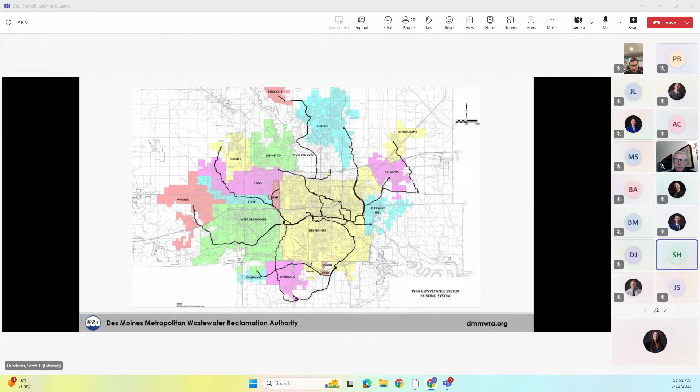Like I said, the City of Des Moines is the operating contractor. The operating contract term was actually a 20-year term that ended June 30th of '24. Right now, the City of Des Moines and the WRA board are working on an amendment to that agreement, or a new agreement, to reflect what's actually been going on lately, and we're anticipating that getting done later this year. We're also working on a new WRA agreement, which facilitates the new facility plan on how we go forward as far as funding all those projects, the needs, the growth, and the rehab of the treatment plant and facilities. So that's going to be oncoming as well.

The board and City of Des Moines jointly appoint the WRA director. I, as director, oversee and manage the day-to-day activities of the WRA. And as I said before, all the employees here at the WRA are members of the City of Des Moines Public Works Department.

Right now I'm going to go over the current fiscal year 2026 budget. This will take effect first on July 1, 2025. There are three main categories of this budget, and this budget was approved last month at the WRA board meeting: O&M (operations and maintenance), debt service, and the capital improvement plan.

For FY26, it was determined that we will collect $66 million from communities. Our net operating budget is about $13.2 million, which is offset with revenues and prior year credits. We actually underspend every year a little bit, and we give that money back as credits. Then we have revenues, which I'll get into a little later. The operation budget has remained relatively flat.

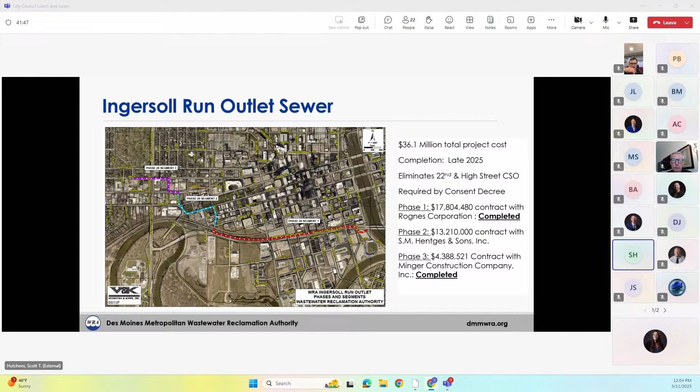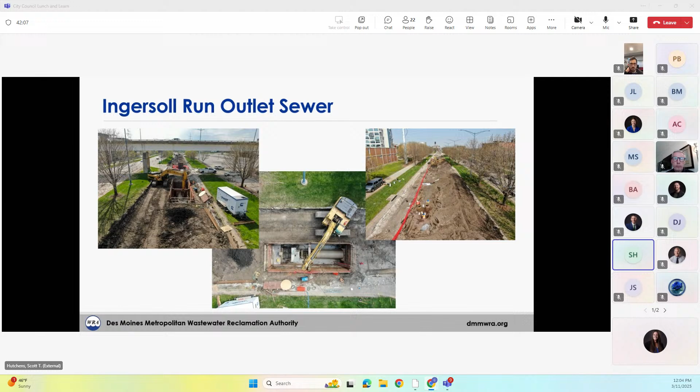This is a project that if you were downtown Des Moines on MLK going down to the Cubs or the Science Center, we had the whole south or north lane of MLK completely torn up. It was a very disruptive project, but it got done ahead of schedule, believe it or not. We reopened that 6 months early compared to when the contract was available, so we were glad to get that project, even though it was a big disruption for anybody traveling in downtown Des Moines.

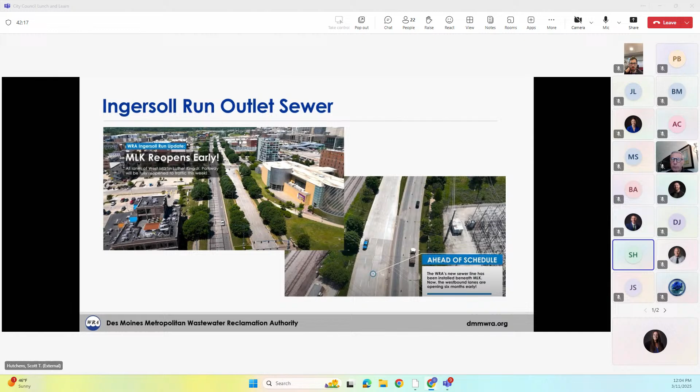The next project is the Birdland Pump Station. This is part of our consent decree, down by the Birdland Marina. The picture on the left is the old Birdland Pump Station, which needs to be rehabilitated because it doesn't have the capacity that we need.

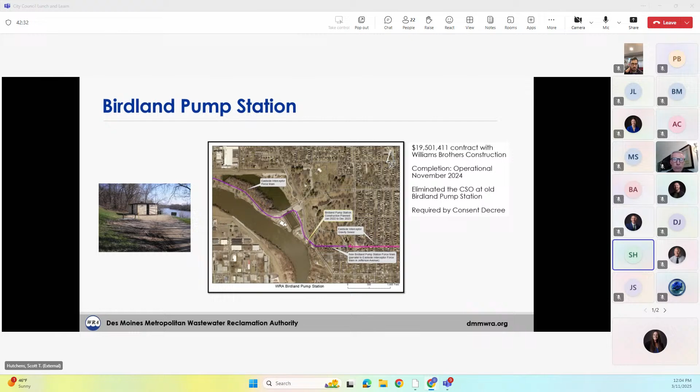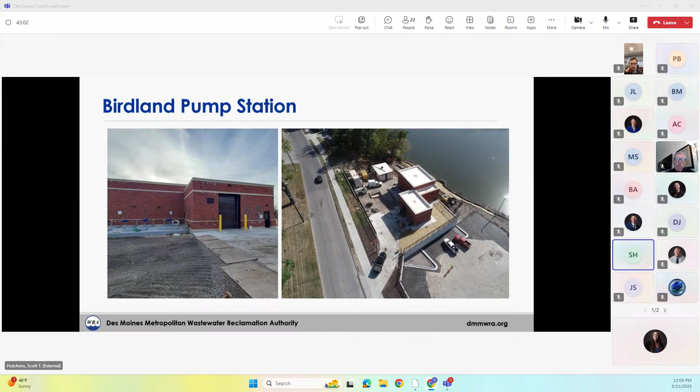This project is now complete, but these were pictures during construction. As you can see, it's kind of unique architecturally. We worked with the neighborhood to get this to fit in with the old and new of that area. It looks like we bricked up old windows, but that was by design. It's a brand new building, but that's what the architect and the neighborhood agreed to, so we made it fit into the area down there. That's just the internal components of it with the pumps and the bar screen.

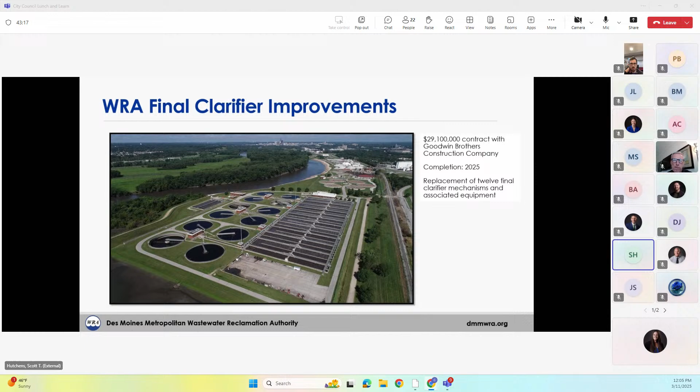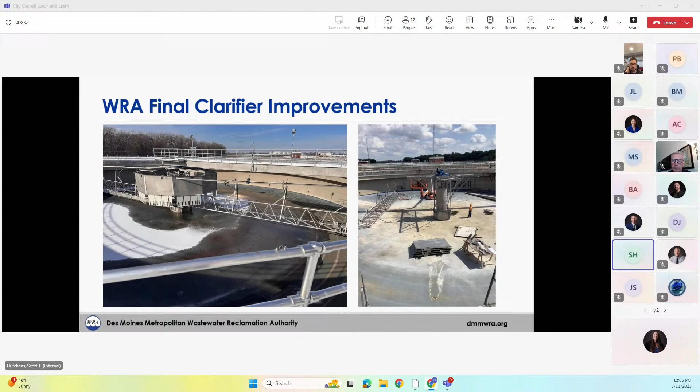This is a final clarifier improvement project. All those round tanks you see on the left side are final clarifiers. Those have been in operation since the mid-1980s. The internal mechanisms, as you see here, these are the new ones. They run continually, and they just flat out wore out after 40 years of continuous work, so those all needed to be rehabbed and redone in order to make sure we continue to process the wastewater like we need to.

WRA Effluent Pumping is a project partially funded by the Flood Hazard Mitigation Grant Program that the state had, in conjunction with the city of Des Moines, and we received quite a bit of money for this project. When the river is up, we still need to be able to get our treated wastewater out. In the past, we've had trouble doing that and it backs up into the system, so when river levels are high, we'll still be able to get the treated wastewater out.

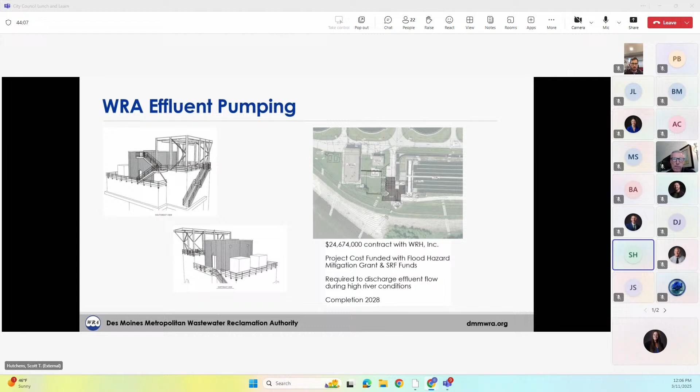That's what this project will do. This project just was bid and is just getting started, and will be completed in 2028.

We actually have an additive that we currently add to the wastewater that helps break that down, but the phosphorus recovery project will completely eliminate that and will help us when phosphorus does become part of our permit levels. We'll pelletize the phosphorus and get a little revenue, about $900,000 a year from doing that.

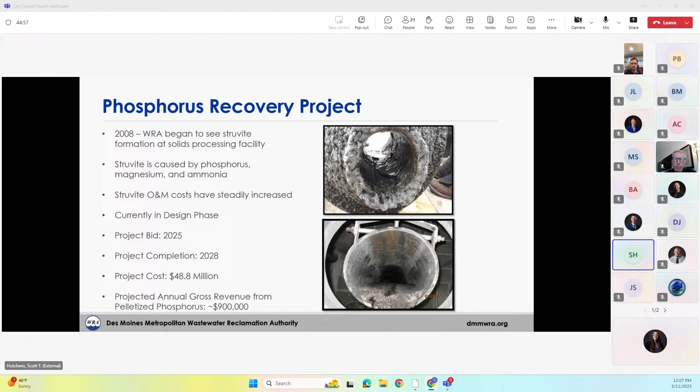This project is going to bid later this year, and it's about a 3-year completion. This is just an overview of what the project will look like.

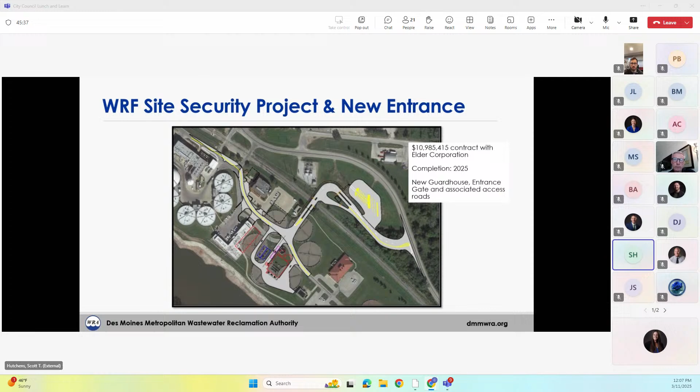So we have sewer lining projects. Some of our sewers in the WRA system were built in the 60s and 50s and are starting to run out of their useful life. So instead of tearing those completely out and rebuilding them in place, we just line that sewer. We have several projects planned through FY28.

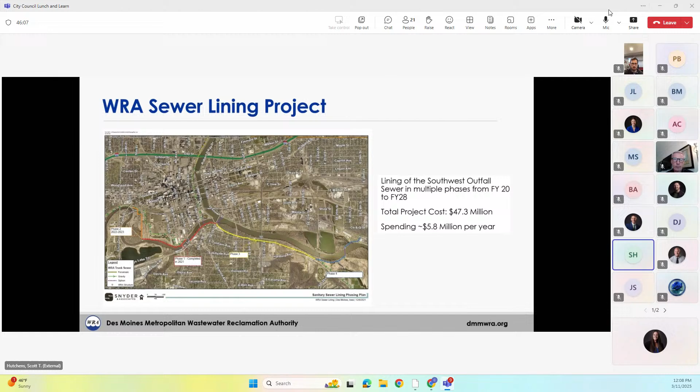We've been lining a little bit of each one of those projects, each one of those sewers, every year, and we continue to do that.

The Renewable Natural Gas Project is where we take our biogas and clean it up to natural gas grade and inject it into the MidAmerican pipeline. This project was completed about 3 or 4 years ago, and we have a 10-year contract with Shell Energy to purchase all our renewable natural gas.

We currently generate about $6 million of gross revenue, and we're hoping to have that continue. The project cost about $20 million, and that will be a 4 to 5 year payback.

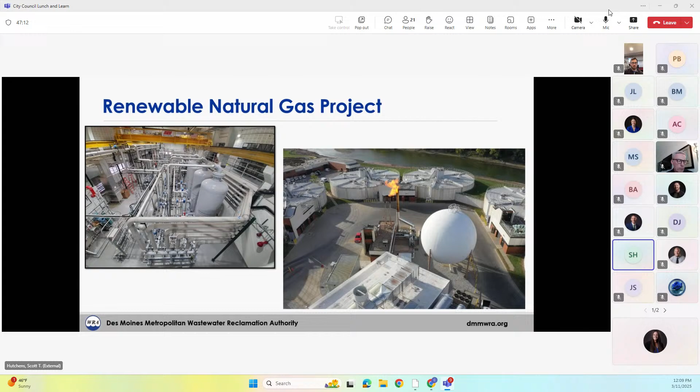And we did a financial analysis. It's better for us to sell all our gas because of the environmental attributes and the money we receive for those, the green credits basically, and then buy back all the gas we need to run our treatment plant. It's financially a benefit to us.

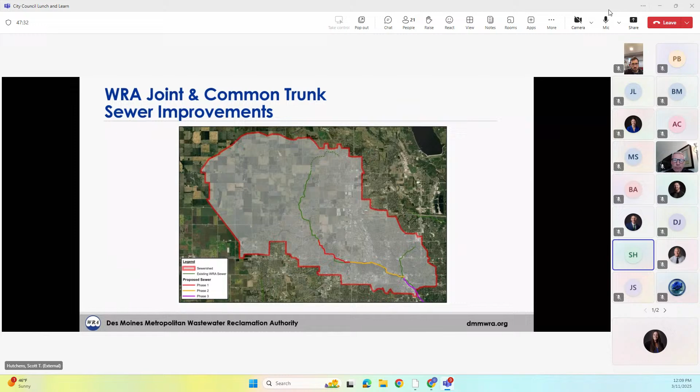It starts down here on the lower right, at 63rd and Railroad in Des Moines. It comes up and goes by Colby Park, not in the park but near it and Walmart, then dips into Clive and follows the Clive Greenbelt, ending up here in Urbandale, I think around 142nd and Douglas.

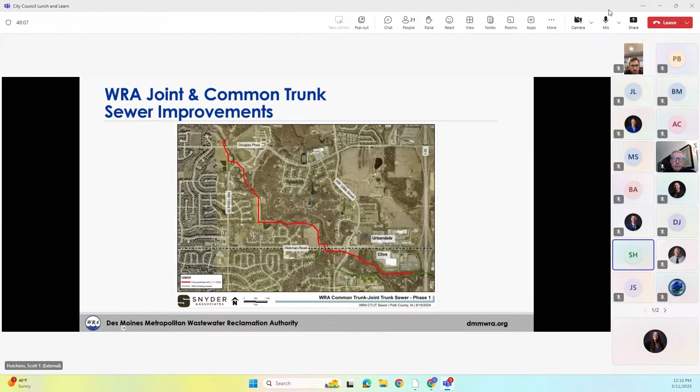So there's a more refined view showing its impacts on Urbandale. This project is ongoing.

We've had one public meeting with the neighbors and the people affected by this project, back in August of '24. There will be 2 or 3 more. We're in the design phase right now. We haven't even started easement negotiations yet, but it's going to be a very large project.

We're starting in the red section because that's where the sewer is needed most. As we move downstream, we usually build sewers from downstream to upstream, but we're doing this one the other way because the need is up at the red section first, then we'll continue down. This is a very long project. We're just getting started, hoping to bid later this year, start on the red phase next year, and continue down until about 2030 when the project will be complete.

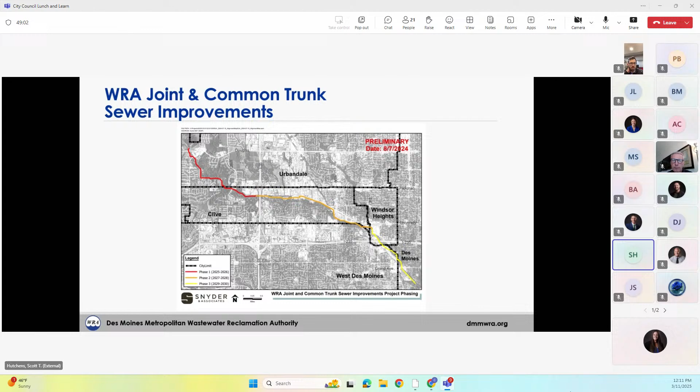The reason for the project is that the sewer was constructed in the 90s and needs rehab. We're leaving the existing sewer in place and paralleling it. It's a very challenging area to build in, but it is needed.

This is a large stakeholder audience, so we're getting out in front of it. We've worked with all the communities, including John Larson, as well as Snyder and Associates, who is our consultant on this project. We'll continue to work with all jurisdictions to minimize impact, but it's a large diameter sewer, so there will be some impact and major disruption as we go through there.

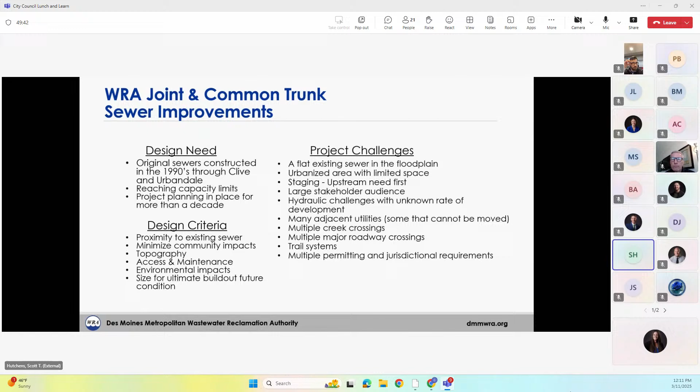This is the schedule and cost of the project, part of the existing facility plan and existing projects.

This project has been on the timeline for a long time and kept being pushed back because it wasn't needed until now. As growth continued to the northwest part of the WRA service area, it is now needed, and that's why it's being constructed at this time.

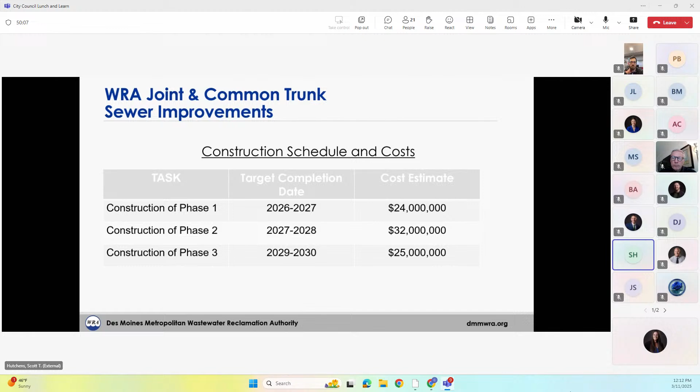Just a few things on the major activities for 2025 for the WRA: we are restating the WRA agreement, which will outline how the facility plan gets paid for going forward, and changing a few things since it's a 20-year document that needs updates, as well as the operating contract. We're hoping to get that finished by the end of the year.

As I stated before, the conveyance system and the WRF facility plan was approved in December. We just got issued our 5-year NPDES permit from the DNR last month, which we've been working on for a long time. We're also designing and constructing many of our WRA capital improvement projects.

Some things for people from Urbandale or the Urbandale Council to remember: the renewal of the operating agreement, facility plan implementation, updating the agreement, completion of the projects and the consent decree, and of course the big one directly impacting Urbandale—the joint and common trunk project.

That's all I had as far as my presentation. I would entertain any questions that you might have.

Hi Scott, this is Bridget Montgomery. Thank you for your incredibly thorough and informative presentation.

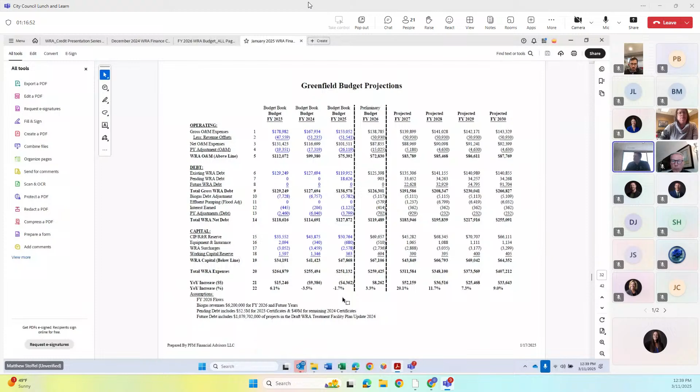So I like to say everything should be made as simple as possible, but not simpler. And the allocation of the WRA budget is not a simple exercise. There's a lot of moving pieces, there's just a lot to take into account.

So if I go back to, I'll start with Urbandale Sanitary Sewer District. We maintain these proformas, and so we work with Paul and the district. They provide us their budget. We build in all of the things we know about the WRA, and then we start to build out, okay, what does that look like in the future? And there's a lot of information here.